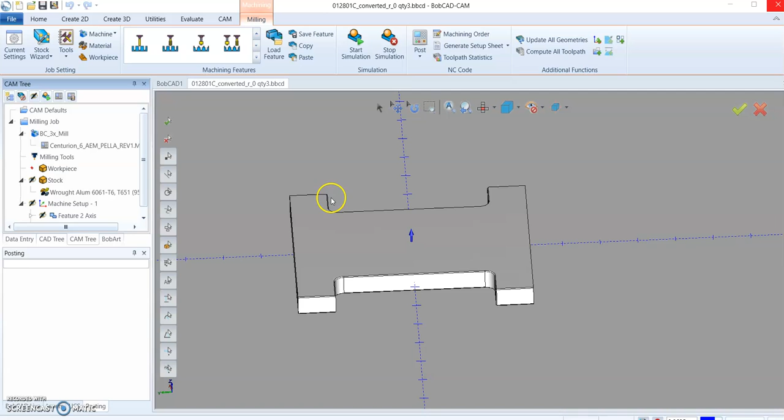Okay, now that we've done the roughing and finishing of the part, facing, these two steps as we're cubing it, there's the facing, expand this, there's the roughing and finishing, then we can move on to doing these small radii.

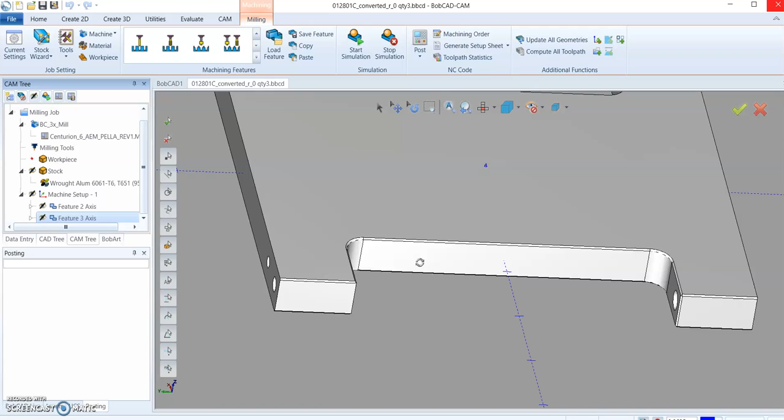So there's a few ways, not radii, sorry, chamfers. A few ways we could do this. We could do this with the angled cutter. For me, I've found it to be more efficient to do things with the same sort of strategies. And in this case, I've found that just a ball end mill and a Z-level finish is the most effective way. I'll right click here, do a mill 3-axis, select all of my geometry.

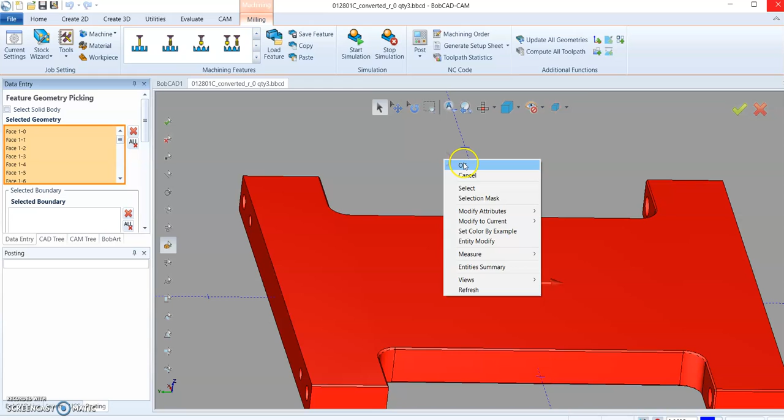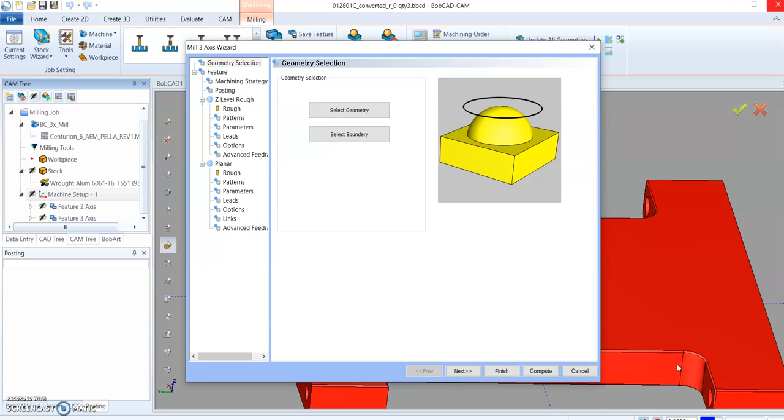OK. Even though I'm doing these, I still want the CAM system to know that there's geometry there so that it doesn't gouge into the part. And then I will determine which levels of the part get machined by either using my depths or by using, later on in the advanced, using check surfaces.

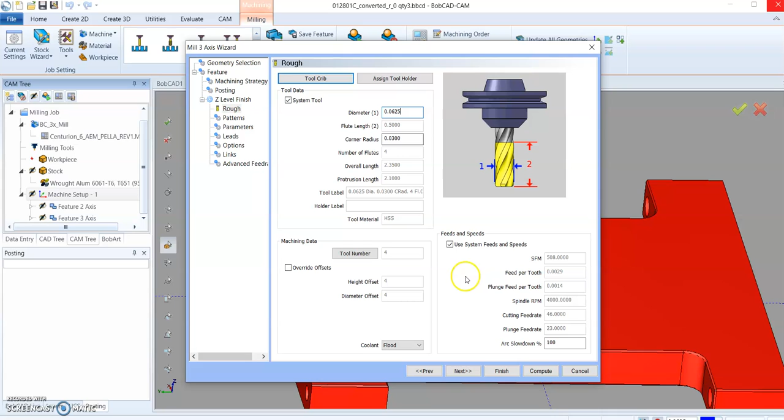So for machining strategy, I'm going to use a Z-level finish. And usually I start with a Z-level finish to do something like this just because it's the most quick to compute and the most reliable. I'll just key in an end mill here. So let's use a 16th with a 30 thousandths radius. Tool 4 is fine. Speeds and feeds will work just fine. Or if you wanted to change them, just click the check box and change them.

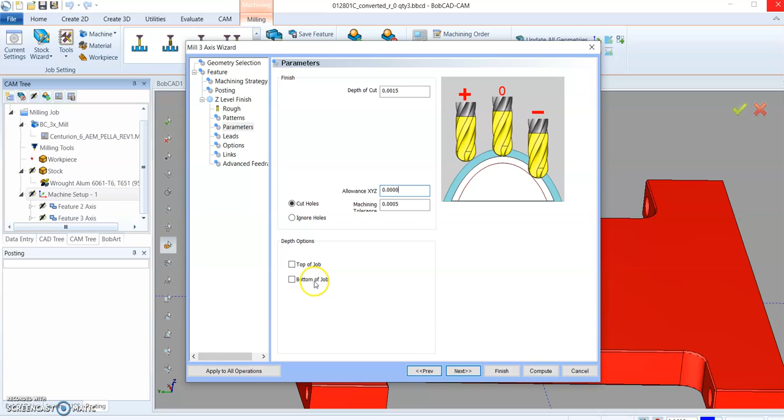Depth of cut, I found that somewhere between 1.5 and 3 thousandths is a pretty good step down for depth of cut in order to get a decent finish. Top of job and bottom of job are here. I'll pick the bottom of the job, which is really just that depth right there, and OK. I'll just give it a little bit past that point, so I'll put negative 0.04 just to make sure the end mill goes all the way down.

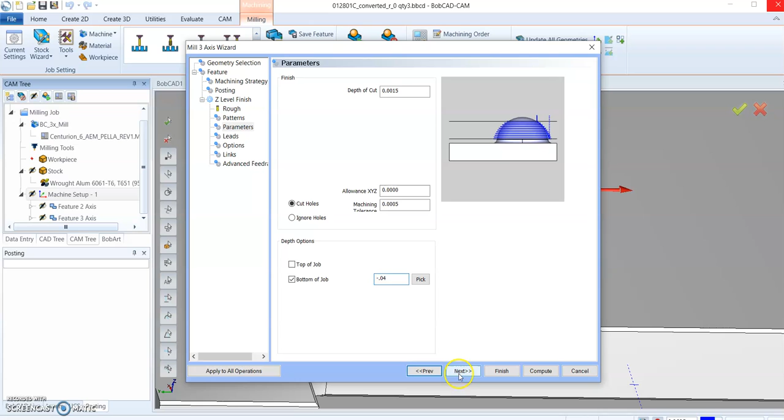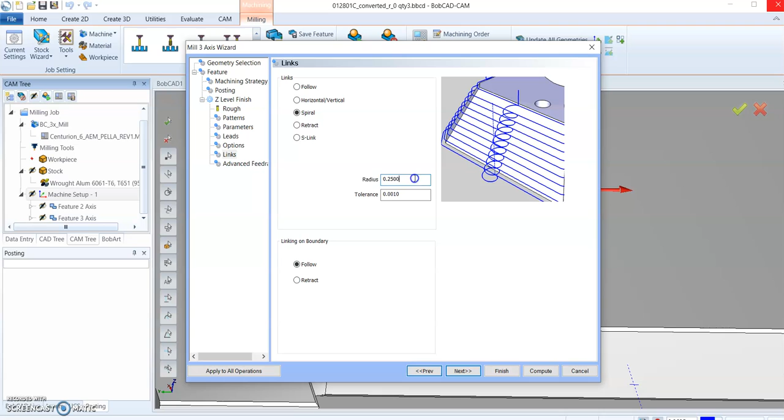And allowance, I'm not leaving any there. If I want to compute a little faster, I can change that. And usually the follow method works fine. However, you want to spiral, which is lead in and lead out. And we'll put a smaller radius there. Tolerance, that's fine. And let's just go ahead and let this compute. See what it comes up with.

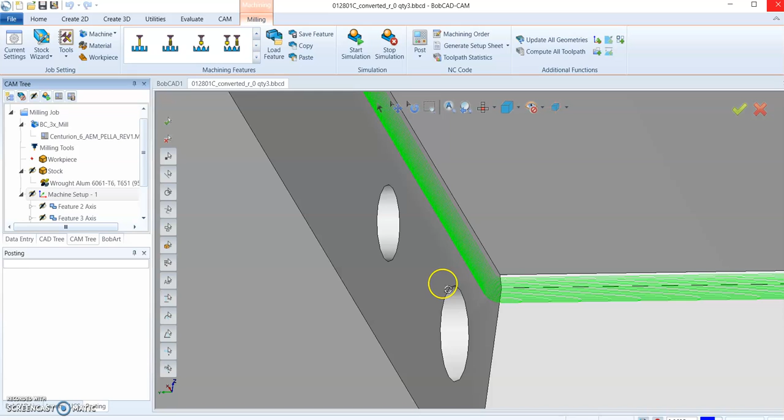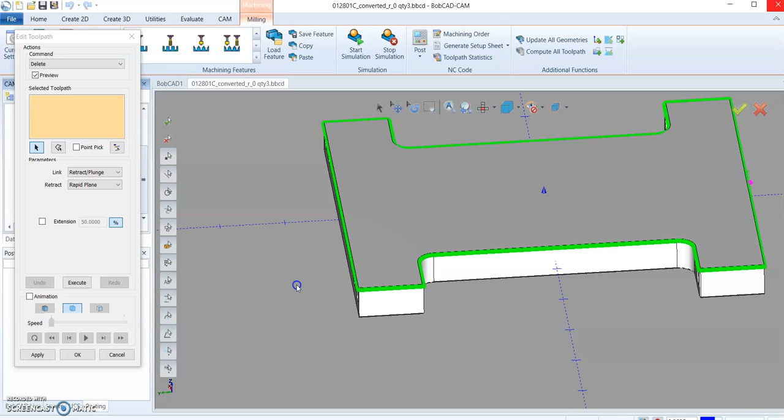Okay, so you can see, well, Z-level finish is okay, but it has the drawback that it likes to just do everything at that Z-level. So in advanced, maybe I could use a check surface, which we haven't covered yet. But there's another way that's pretty slick that we can just edit this. So I right click and I just edit toolpath. Right now I'm in this command to delete. So if I pick all the lines I don't wish to be in my actual cycle and apply that, okay, you can see that it deleted out those lines I didn't want.

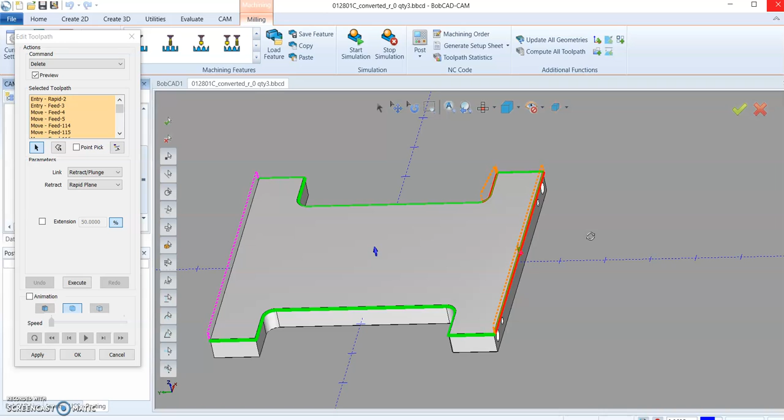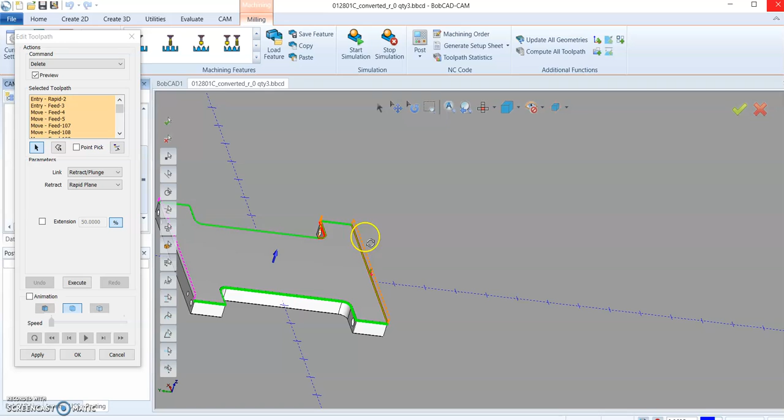Right click, edit toolpath again. I'm still in the delete function. We can look at some of the other ones here. But for now, let's go with delete. Okay, picked something I didn't want to pick. That's okay. We'll just cancel. Go here. Edit the toolpath. And I'm just holding my left mouse. Gosh darn it, did it again. Cancel that one more time.

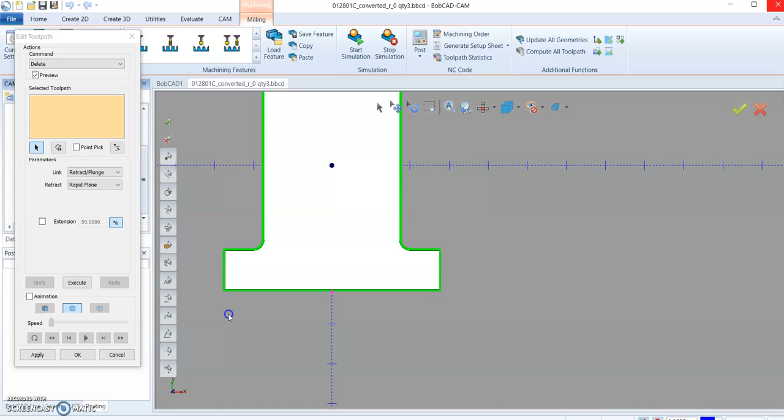If I looked at a named view, I can right click, go to a named view to make this a little easier. No. Edit toolpath. There we go. Select what I don't want and apply. Okay, that. I could get down to the nitty gritty and delete all these tiny lines out. There's no real reason for me to do that though. The outcome will be what I'm looking for.

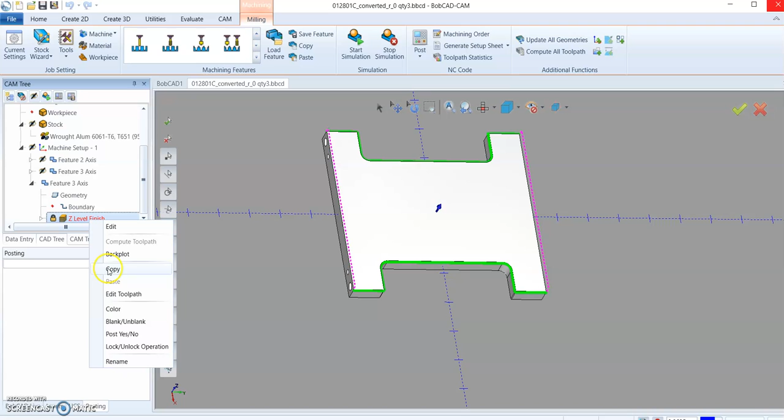You see it also locks the toolpath, so even if I recompute it, it's not going to change until I would right click and unlock the toolpath, which you can lock any toolpath at any time. It just does it automatically when you edit it. So save that.

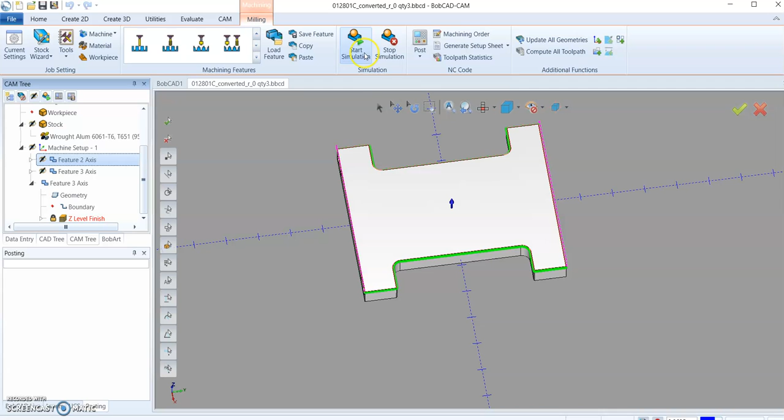Now all of these are posting out. If I didn't want to post something out, I could right click and choose post yes/no, and you'll see when I do that what happens. There's a little X on it that says I'm not posting that out, but really I do want to post it out. And if I wasn't posting it out and I simulated, then it wouldn't show up in my simulation. But from here, we can go ahead and get a good idea of what it's going to do.

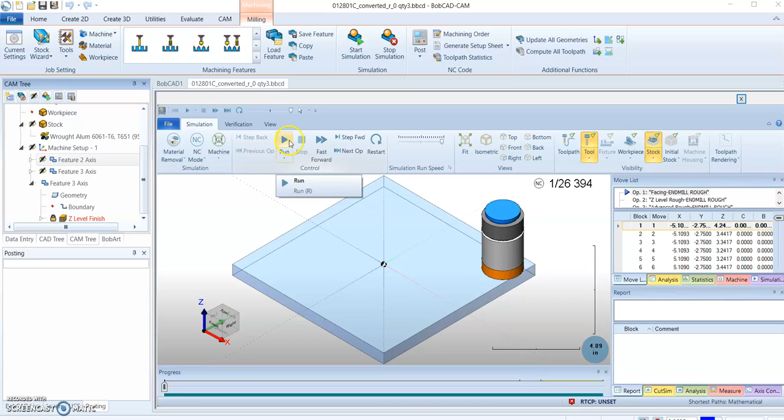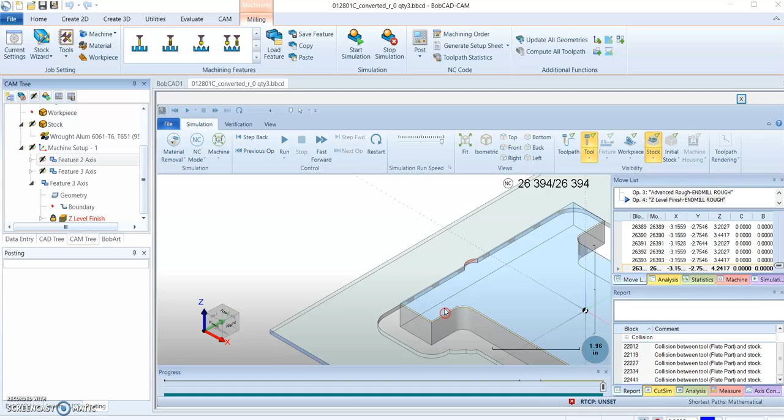For now, what I like to do is just hide the workpiece. I like to not see my tool paths. I'll go ahead and run this. And we'll zoom up. You'll see that indeed our chamfers are on the part. Yet it's not gouging. We'd want to check that, make sure. If it shows up in your simulation, it's going to show up in your finished part. Looks like a good part.

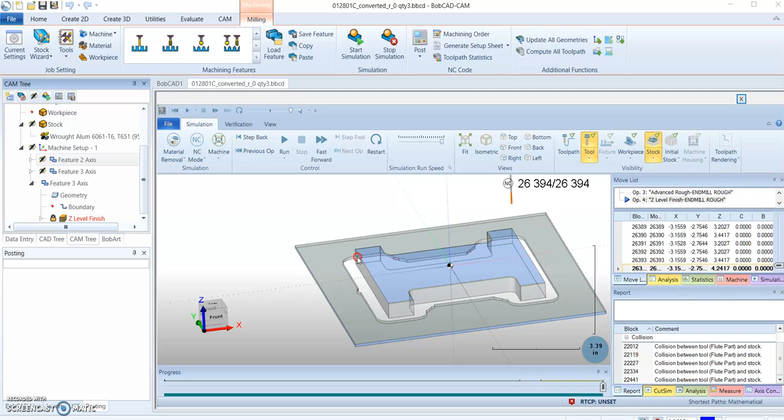Again, in the cubing example, this would be extra stock left. Then I would flip it like so and hold it in the vise and then face off this backside and have a semi-finished part so I can just pop my holes in.

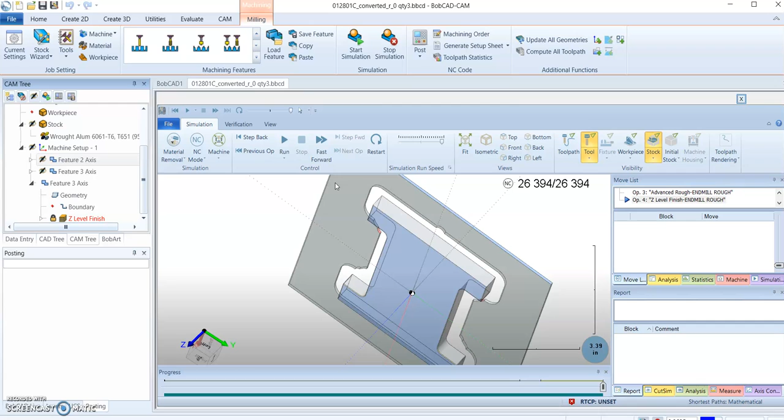That'll conclude this video. Next video up, I'll work on setting up multiple machine setups. So far we only have one. Actually, I have time for that yet, so let's just hit that one up. So I'll just collapse all that and I'll turn that off for now.

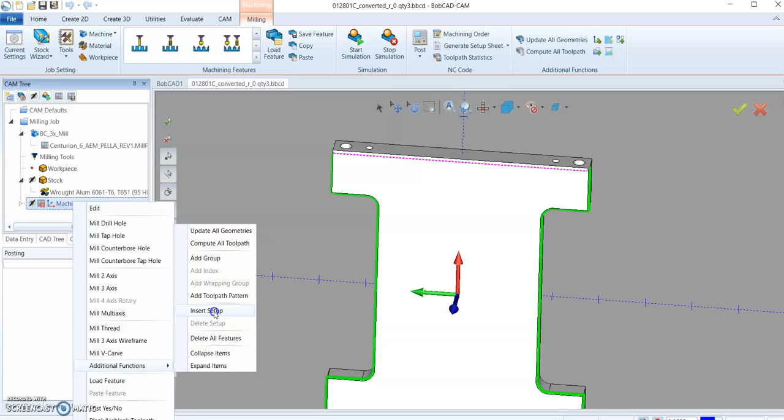Post yes, no, and if I right click on this, go to additional functions, I can insert a setup. The setup is still based off the stock that's here. Now there's two options, I guess, for doing multiple machine setups. I can create one in the same program, or I can go to milling job, go to CAM defaults, and just make an entirely new job. Each job then is posted out individually, which means I get individual programs, which may actually be the better way to go in this case.

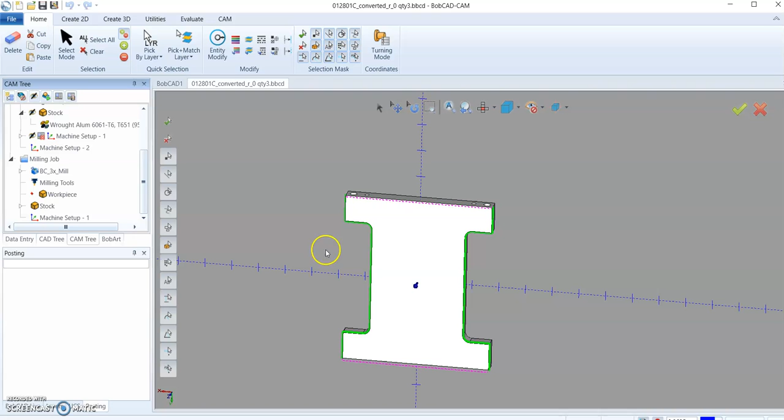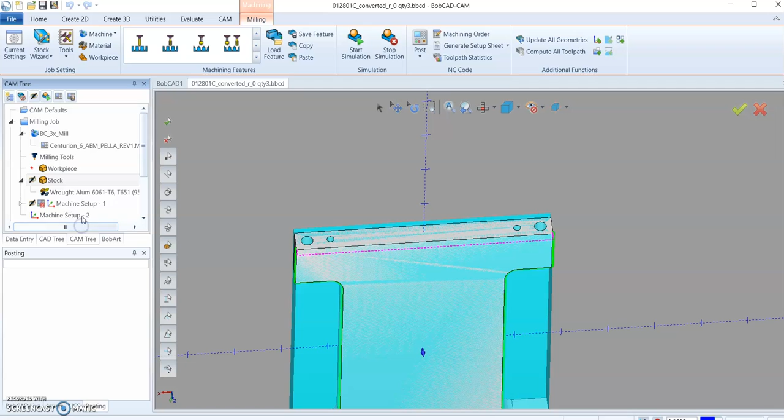So even though you saw there's a machine setup, let me just do both. You'll see why. So I'd have to come back here and just have it calculate my stock out again to get the raw extents of the part. Then I'll OK that and alter this machine setup two. And suppose I want it to be the back edge of the part one way or the other. You can see that it's giving me the extents based on the other extra 1/8 inch I added.

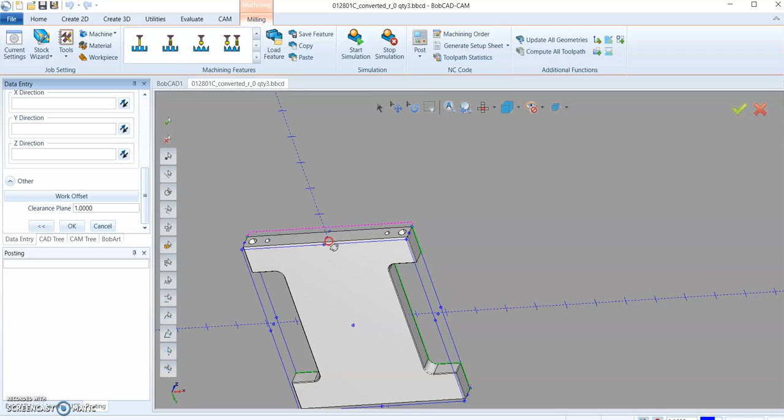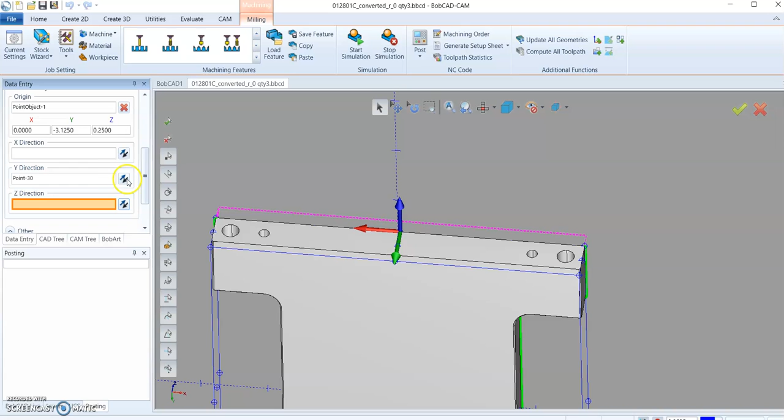So for now, I'm going to say that this backside of the part is where I want it. I'll go set my origin to there. Notice that my orientation is not correct. That's fine. I could do that in a few ways, but I found this to be the easiest. Just select which direction is the Y and then flip your Z. And we can flip the Y. And there we go. We got it how we want it. OK that. Again, we're going to save changes often. So now we have a new machine setup.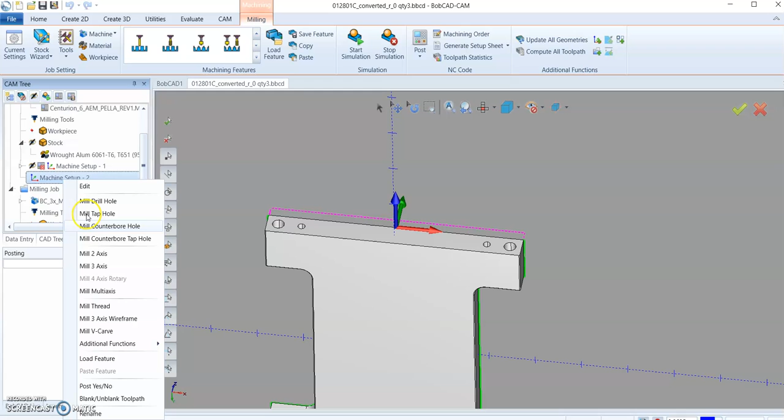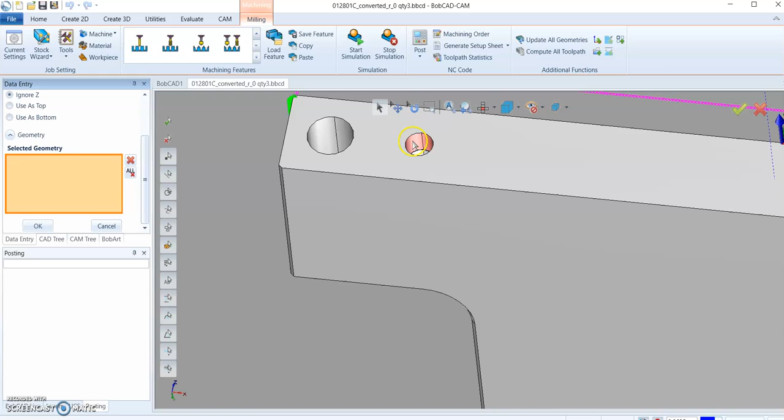So as far as drilling holes, I have to give BobCAD credit here. BobCAD does a pretty great job with holes. And as you know, holes get made often in machining. So just like most things, you right click on machine setup, come in here, I want to drill a hole, select that geometry. Now pick individual; you can pick both hole sizes and go with it, but I don't think that's a great idea.

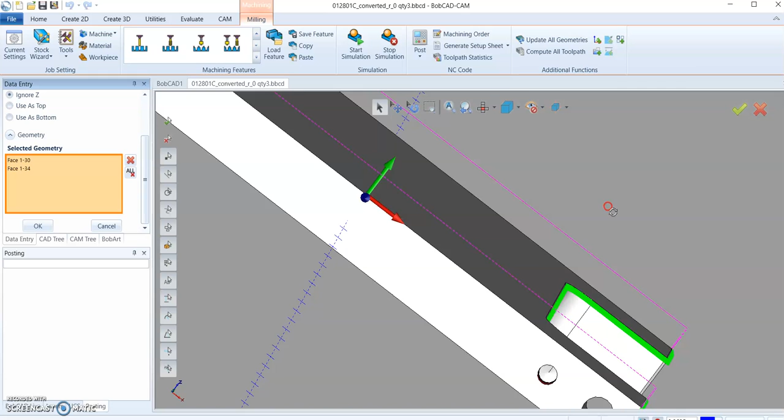You can see they've modeled some sort of tap in here. I'd have to consult the PDF. For now, I'm just going to make sure I get all of those hole surfaces that are there. Sometimes they're broken up into multiples, but this time one surface was it for that hole. I'll right click and OK. You can see I got a 0.1575, which tells me this might be a 6-32 tapped hole. But right now, the strategy I'm in is just hole.

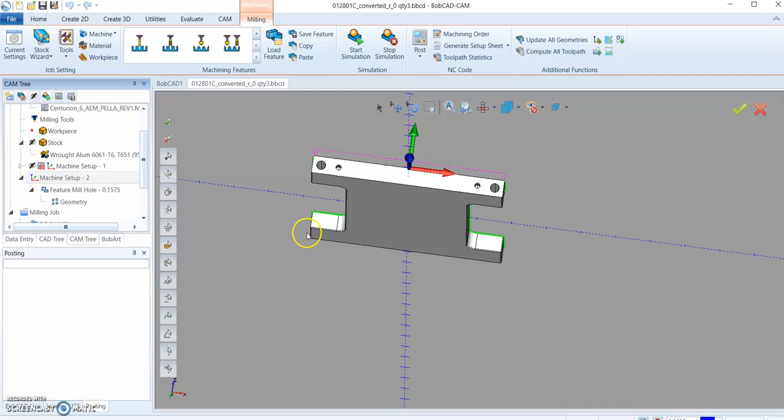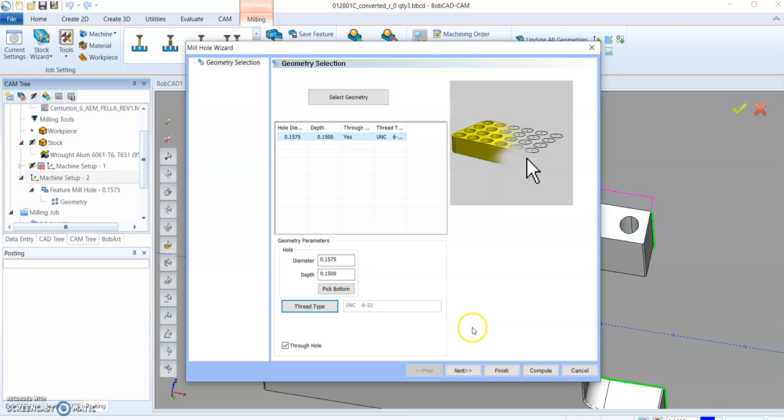Interestingly enough, though, this lends itself to something else. So let's finish this. And if I knew that it was a tapped hole, I could come in here and do a mill tap hole. Select geometry. We'll do that. Right click and OK that. Then from here, sometimes they'll give you a basic idea, but if I know what thread it is, I can come down through here. Let's say it's a 6-32. OK that. And as I pick that geometry, it knows the depth from the model.

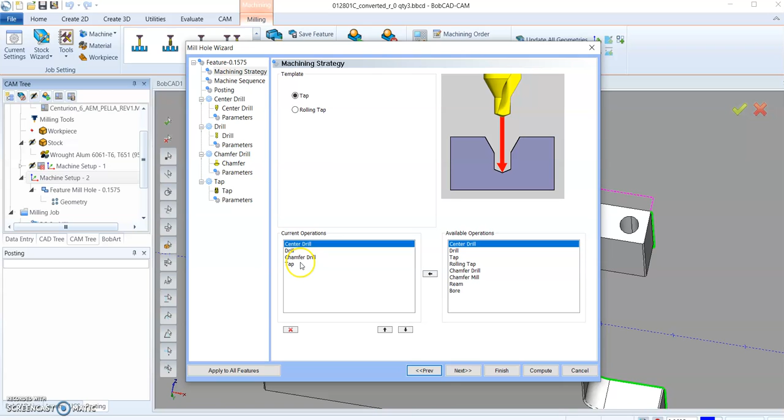This is giving me a strategy of center drilling, chamfering, and tapping. Well, I'm probably not going to chamfer this. I'm just going to do it with a spot drill. So from any strategy, I can come in here and delete what I don't want. I'm going to fly through this and just take the tools that they give me so I can get this out in the 15 minutes I have. But you can see the correct drill size was selected because I said it was a 6-32, so that's nice.

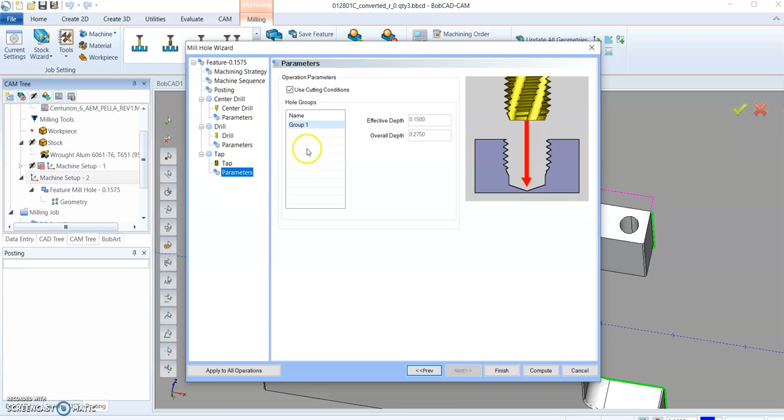And then I'm getting the 6-32 tap, and it's taking pitch times RPM and doing all those calculations for me. Now I'm probably not going to do it at 1700, not inches per minute, sorry, 1700 RPM; probably more like 200 RPM, and the feed rate updates. And be careful when drilling because you can have multiple groups. You have to deal with multiple groups separately.

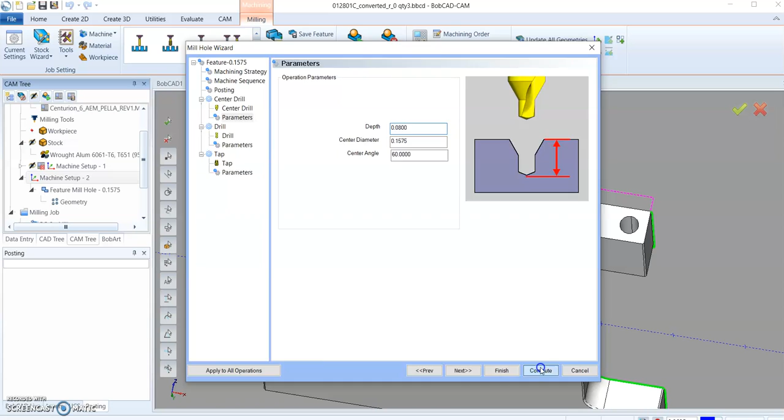Drilling, right? Here's the parameters for drilling. I want to peck it. And if I want to override this, I select it, and let's just say I want it to be 30. And I'll just apply parameters. So you can either give it your center diameter or depth. So let's go with that. Compute. And then from that, I get my hole pattern, and that's ready to go.